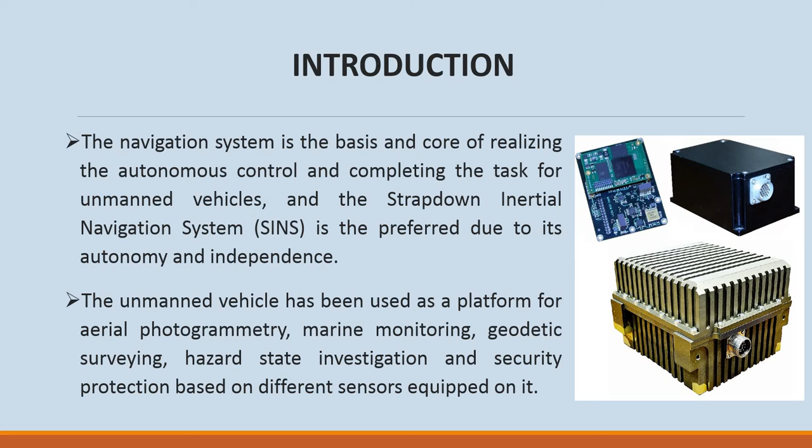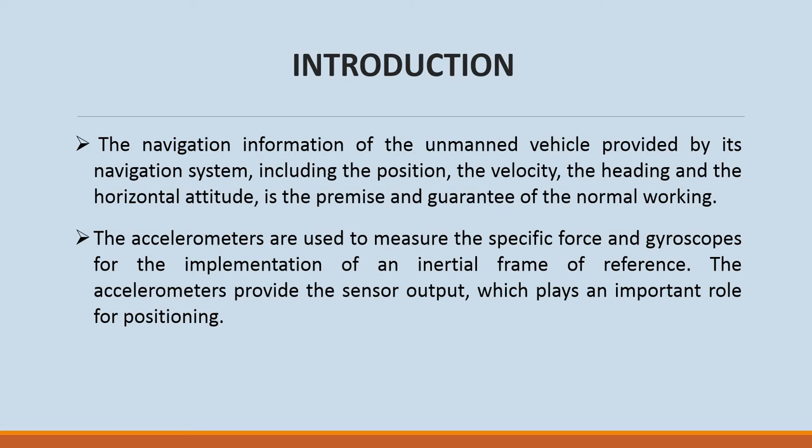The navigation information of the unmanned vehicle provided by its navigation system includes the position, velocity, heading, and horizontal attitude. This is the premise and the guarantee of normal working. The accelerometers are used to measure the specific force, and gyroscopes for the implementation of an inertial frame of reference. The accelerometers provide the sensor output, which plays an important role for position.

The accuracy of the strapdown inertial navigation system is mainly affected by the errors of the sensors. One of the main factors is temperature, of course, which affects the stability, accuracy, and reliability of an inertial navigation system. The temperature variation of the environment and heating in operating systems affect the accelerometer and electric circuits, which may vary the zero offset and scale factor of the accelerometer.

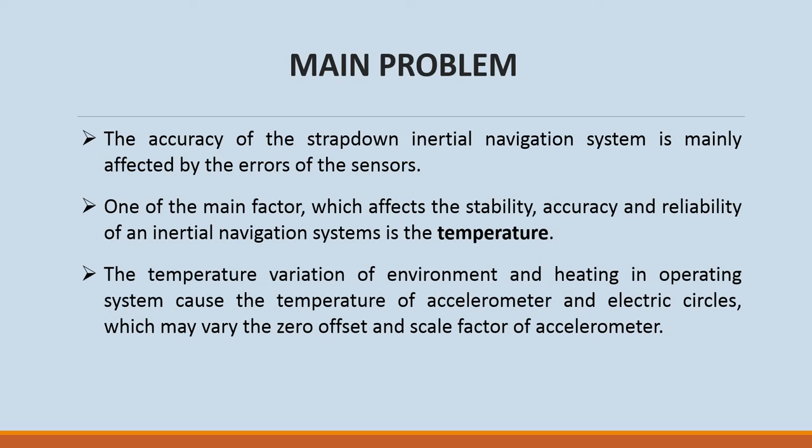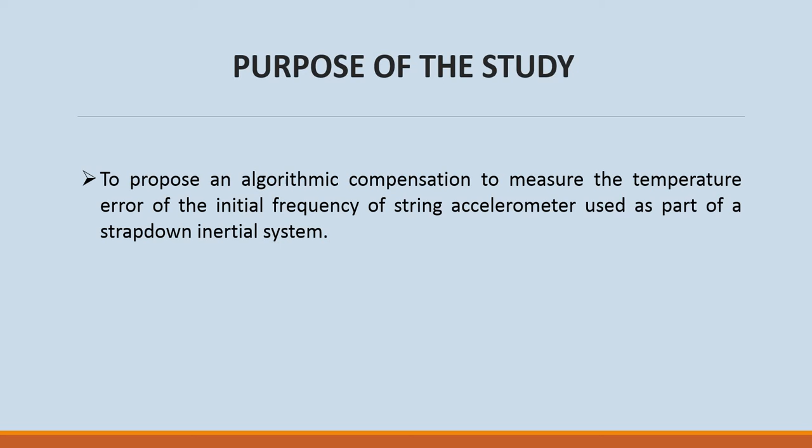So the purpose of our study is to propose an algorithmic compensation of the temperature error of the initial frequency of a string accelerometer used as a part of the strapdown inertial system. The study consisted of collecting output information from the device during temperature calibration of string accelerometers.

During the experiment, the strapdown inertial system was oriented in space so that the measuring axes of the accelerometer channels were directed alternately vertically upward or vertically downward with a smooth temperature change. In addition to the string element itself, the accelerometer includes an information pickup device and the string excitation device, developed by company NPO IT, Russia.

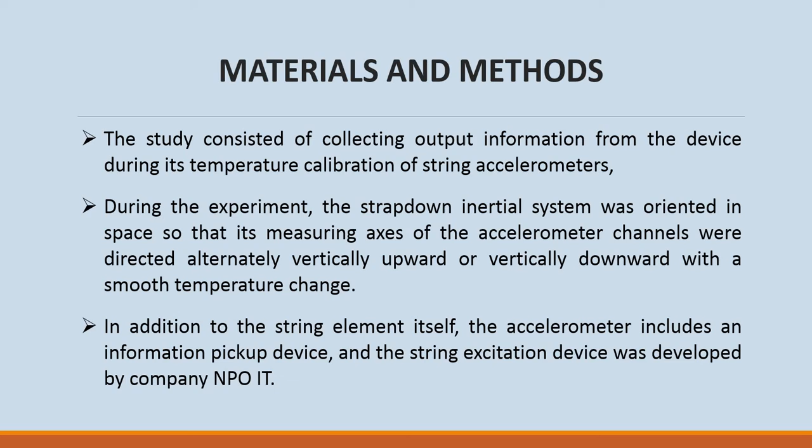During the experiment, we studied the change in the initial oscillation frequency of the string accelerometer and the design parameter. During the calibration, the instrument was periodically turned off for 1 minute, and then one measurement was performed. The instrument was turned on for 10 minutes, during which the values of the parameter f, the vibration frequency, and the design parameter were measured.

Based on the results of the studies of the conditions of measuring the instrumental errors of the information management system channels in the operating temperature range, the measurement of the instrumental errors of the linear acceleration sensor channel was carried out in only one measurement condition: continuous temperature change from -16 to 50 degrees when the linear acceleration sensor channel was turned on or off.

The output signal recorded by the channel information management system was carried out within 200 seconds after each 60 seconds. After power supply, the time of test object readiness was 60 seconds. As a result, we get the change in the initial oscillation frequency of the string accelerometer in the operating temperature range, and of course the design parameter, for 3 different cycles.

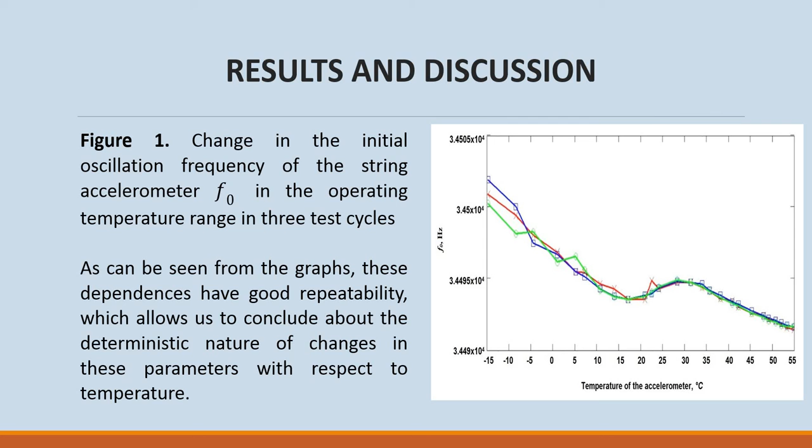As can be seen from the graphs, these parameters have good repeatability, which allows us to conclude about the deterministic nature of changes in these parameters with respect to temperature. The verification of the obtained approximating functional dependence of the coefficients of the polynomial approximating function of frequency and design parameter in different temperature intervals was carried out by using these equations.

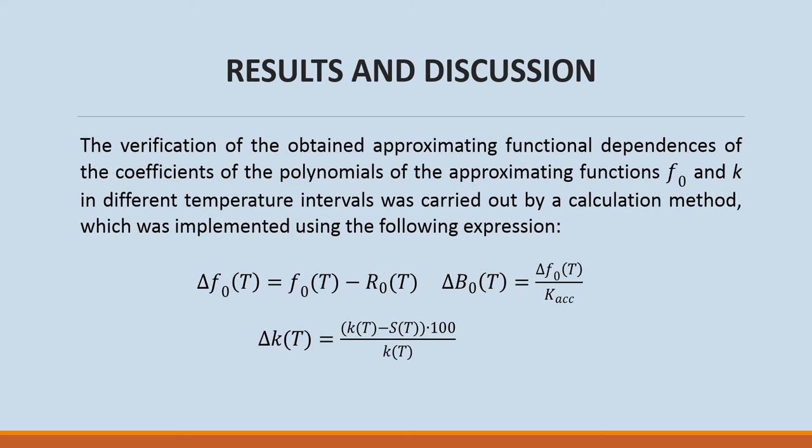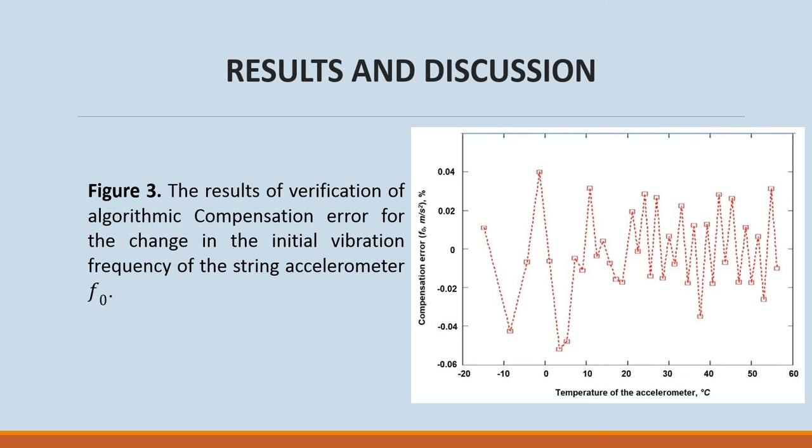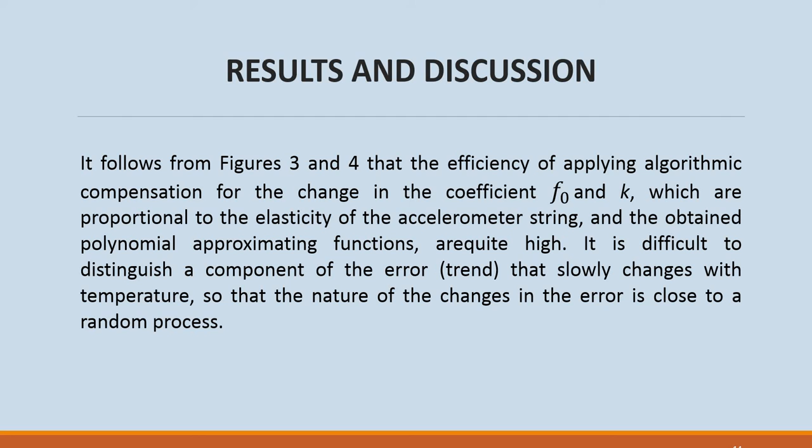Then, based on the result of the verification, the algorithmic compensation error for changing the frequency and design parameter was obtained. It follows from these two figures that the efficiency of applying an algorithmic compensation for the change in the coefficient of frequency and design parameter, which are proportional to the elasticity of the accelerometer string, and the obtained polynomial approximating functions, is quite high. It is difficult to distinguish a component of the error that slowly changes with temperature, so the nature of the changes in the error is close to a random process.

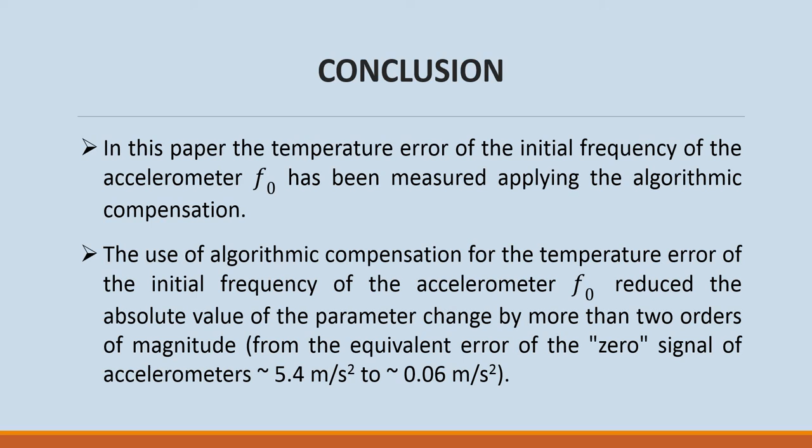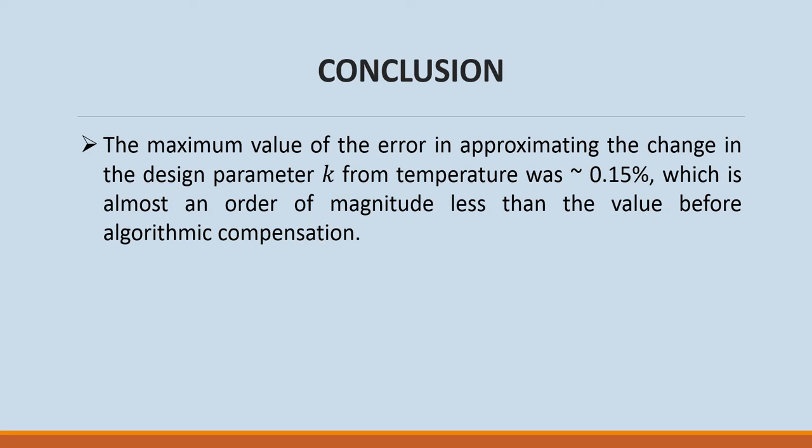As a conclusion, I would like to say that in this paper, the temperature dependence of the initial frequency of the accelerometer and design parameter was studied and measured. It shows that the use of this algorithmic compensation for temperature error reduced the error for the frequency by more than two orders of magnitude, and for the design parameter it is almost an order of magnitude less than the value before algorithmic compensation.